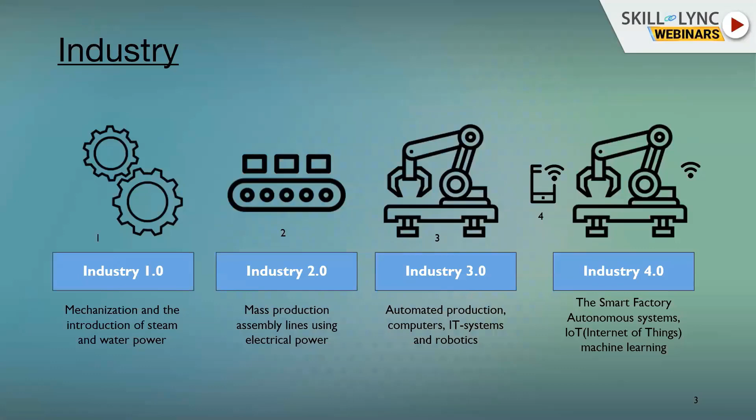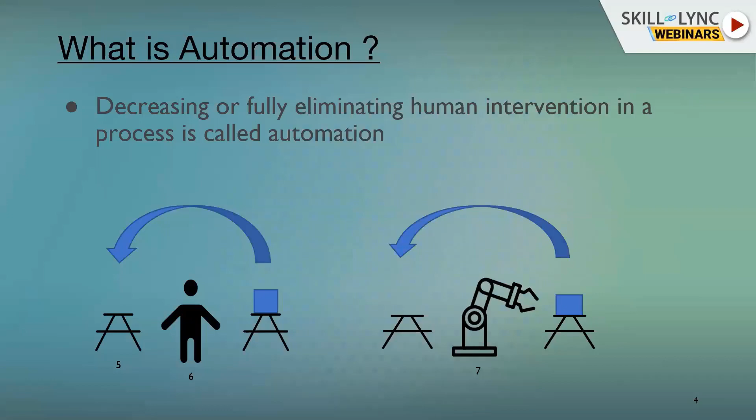I have a couple of examples here about automation. The one on the left talks about refinery automation. It can be an example of probably the oil industry, or some chemicals, or petroleum, or any other thing, even probably medical. So it's about having some liquids that has to go through a process. It goes from one location to the other, and you have sensors and valves which are controlled remotely through a computer, and everything is run through the computer in a control room. So that's one type of automation that you would see.

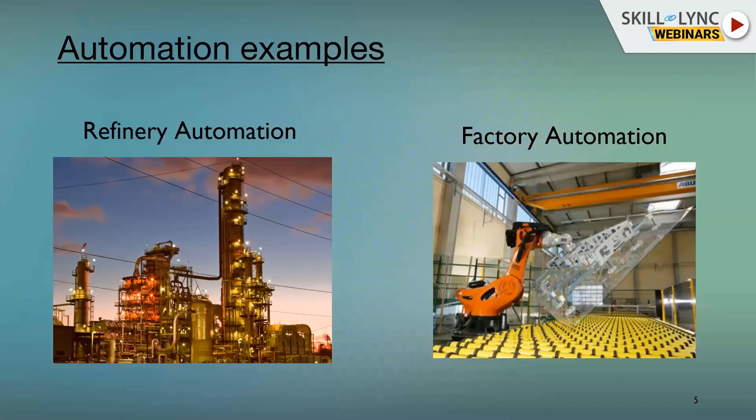On the right side, what you see is a factory automation that you probably see more on TV and in the news and media, where you are probably using a robot or some other device for handling and doing some action, which is decreasing the use and requirement of human intervention. So this presentation would be focusing more on the one that you see on the right side, that's factory automation.

So again, in factory automation, you might have an option wherein you might go with semi-automatic, the one that you see on the left, wherein you still need human intervention, but the machine is going to help you in making it simpler and faster. On the other side, the right side, you see a fully automatic solution where you have robots doing the work and you don't need human intervention. So the question that would come to everyone is, when you have the right one where you can do everything automatic, what is the need for semi-automatic? There would be instances wherein it probably makes more financial sense to go with semi-automatic than automatic because of the complexity that is involved, which would drastically increase the cost.

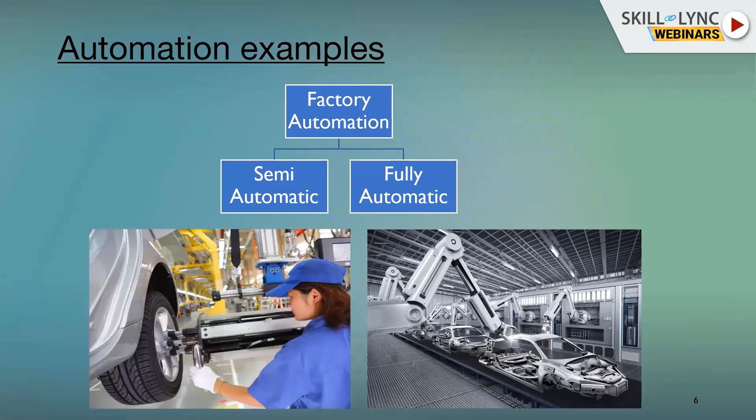So now we will go to look at why we need to automate. The first and foremost thing that motivates companies to go for automation is decrease in cost, because for a company, it's all about making profits. That's the major factor.

Then comes shortage of labor. I know most of you are thinking, what do you really mean by shortage of labor? In the Western world, there are a lot of countries where you have a shortage of labor, so it makes sense for those countries to go with automation.

The third point is about increase in quality and repeatability. Let's take an example of a welding application for a car part. If you have an operator doing the welding, there's a high possibility his hands will not go through the same repetitive path every time he's welding a new part. Or there might be a different operator as it shifts from one shift to the other, which changes the way he welds the part. So quality is dependent on the person, and probably even on his mood. You don't want that to happen. So in cases where quality is a higher priority, you would go with an automated solution so that there is repeatability in quality. The fourth point is talking about human ergonomics and safety.

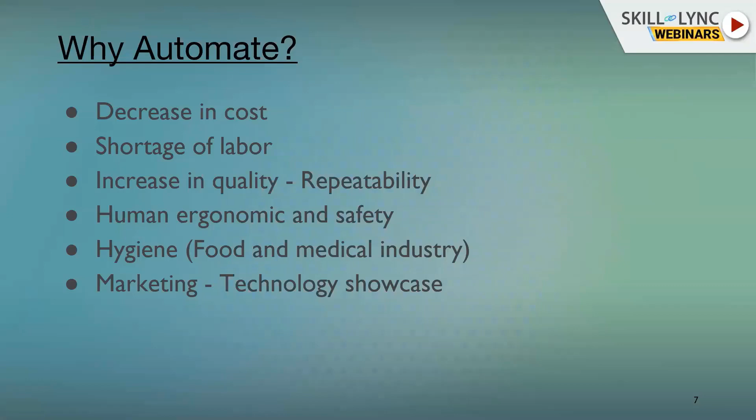Now, as I was telling you, the first point, which is decrease in cost, is the most important thing since it plays a big role for all the factories. So one of the major factors that is calculated is ROI, that's return on investment.

Let's take an example of a manager in a factory who has been given a target for the year to decrease the overall cost being spent on manufacturing. So what would he do? He finds out there is a solution in terms of a simple, cost-effective robotic cell that might cost probably $60,000. And he knows that the average salary of an operator, if he wants someone to operate this machine, is going to cost $40,000. So what is ROI? If he replaces the solution with a robotic cell, then within 1.5 years he's getting back the money he has invested. That's a very good number in terms of ROI, and a win-win situation for him. That's a business case he would present to his management to make the cell automated.

This example I gave was not considering a lot of more details. It is just for you to understand the basic fundamentals here.

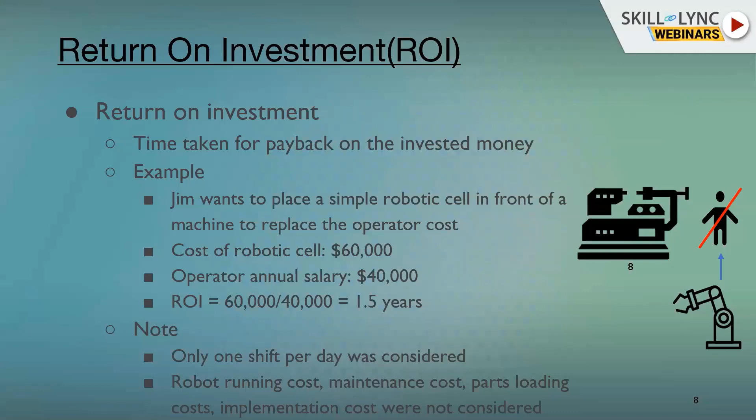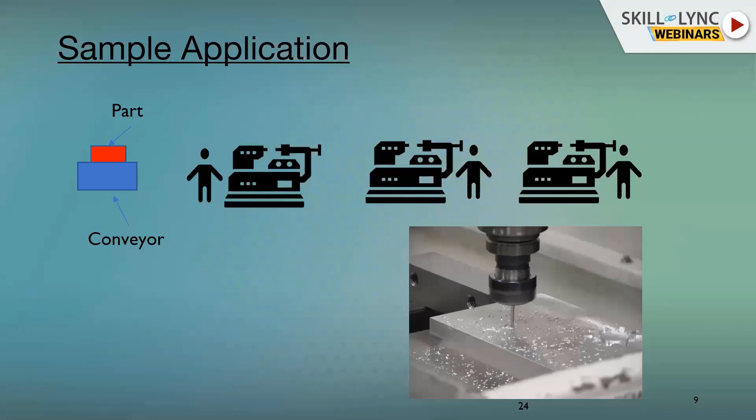Now let's look at some examples and applications. Let's say there's a factory where there are 3 machines which are cutting and drilling onto some parts. Since there are 3 machines, you would need 3 operators. What will the operator be doing? He'll be picking up the red part from a conveyor, bringing it, loading it into the machine. When it's done, he'll pick up the finished part, put it back onto the conveyor, pick up the next one, and keep doing the same again and again. So that's what he would be doing, a repetitive task.

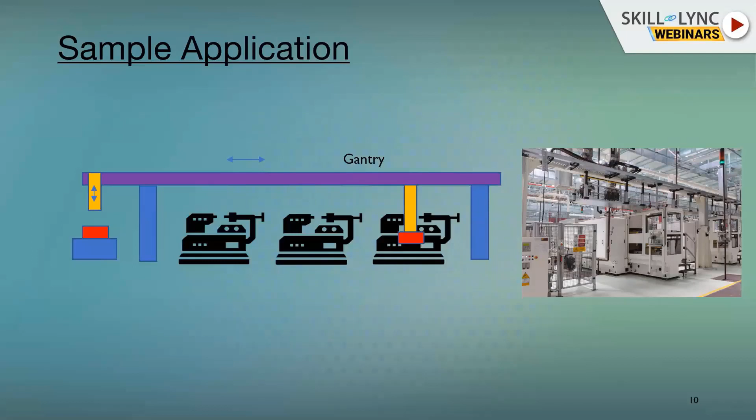Now let's talk about robots. Where does the first robot come into? Robots are more like a subsection within the field of automation. You might have a gantry as a solution, or you might have a robot as a solution. And there would probably be more things that you might provide as a solution to the application.

So robot is a product. I am specifying on the word product. When you say product, you design it without considering the end customer in mind. You will not be looking at what the customer is going to do with it. You just design it so that it can be used in multiple ways and locations.

So what are the major parts of the robot? In the middle, what you see is what you generally think about when you think about an industrial robot. That's a manipulator, the mechanical device. On the left is the heart or the controller, more like the CPU of your old traditional computer. On the right side is a teach pendant, a touch screen which helps in moving the robot around, as well as in programming. This is sold by a few companies as a standard product, which is later improved to make it a full-fledged solution based on the customer needs.

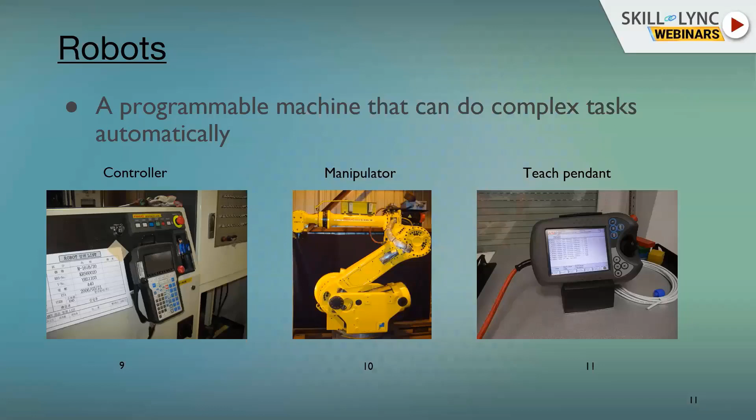Again, I repeat, this robot is a standard product. You would be providing a customized end of arm tool based on the application. And you would provide a full-fledged solution like this based on the customer needs, the space he has, and his production rate.

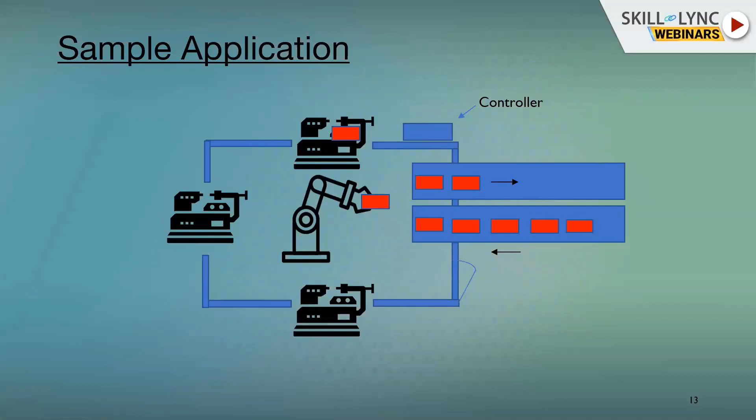Now let's talk about safety. Safety plays a very, very important role in any factory. When you are probably walking on the street and you look in general about India, you would come to a general conclusion that safety isn't that big a deal in general. But when you go into a factory, it is very important for the reason that it defines the image of the organization.

Let's say you are working in a multinational company which has factories all around the world. Even one small injury to one operator would have huge consequences. The news would spread like anything all over the world saying that the factory is not safe there, and it would have huge repercussions. It's more like if you find an insect in a cool drink and the news gets spread like wildfire.

What happens to a brand if you find an insect in the bottle you have in your hand? It drastically impacts the image of the brand. In a similar way, this has a huge impact on organizations.

So factories give topmost importance to safety. A robot is a device that does the work automatically, continuously, without any break, without thinking about human intervention.